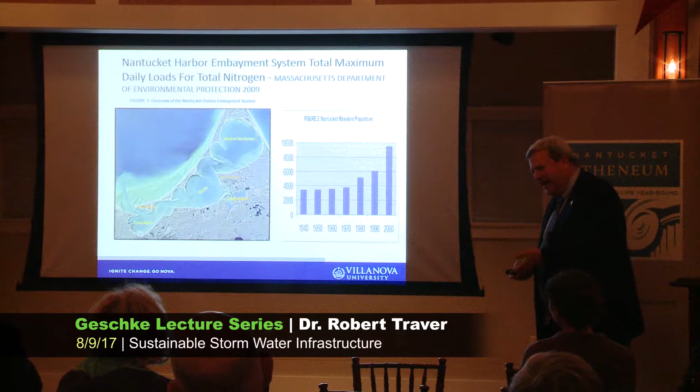It's always interesting to go to different areas of the country because the water issues are different everywhere you go. So I've done a little homework here, and from the conversations at dinner, I'm sure I will be corrected if I don't get it all right. But anyway, what is sustainable green stormwater and why is this important to us? So I started taking a look at, thank you for sending us some material ahead of time, your site page for your municipality.

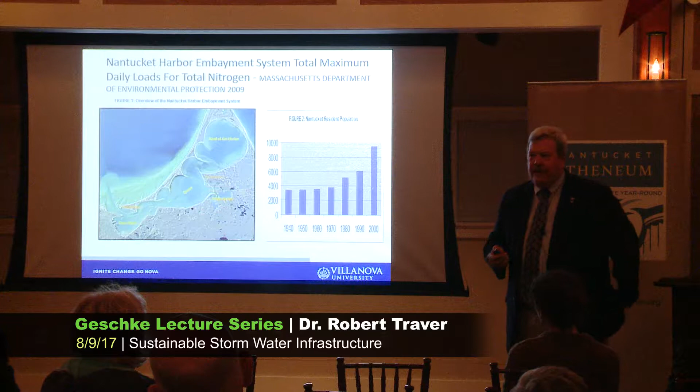And like many areas of the country, you have something called a TMDL, the total maximum daily load, and you're specifically focused on nitrogen. That is a requirement we have in the Clean Water Act to look at our waters and get them to fishable, swimmable status. In this case, your area is limited by nitrogen. It's very common all over the country, but each one is a little different. Yours is nitrogen, and it's basically related to scallops.

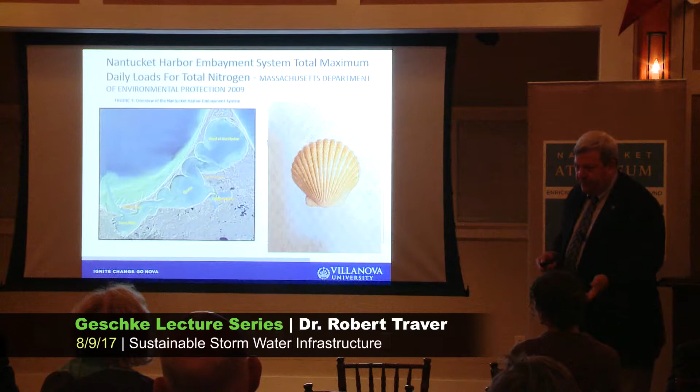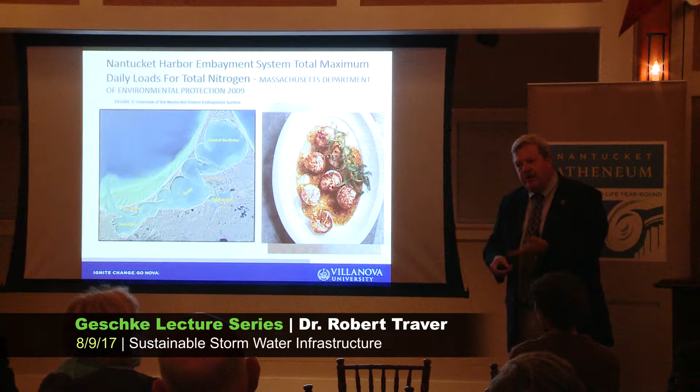From what I understand, your scallop industry is not as productive as it was, and it's off a little bit every year. I found this last night, so I came in early enough to do a little investigation of the beaches. And scallops represent an industry, a way of life, and something Nantucket is very famous for. It's a very tasty morsel, and just like Chesapeake Bay has been highlighting their crabs, you're very similar, but with scallops. And they are limited by nitrogen.

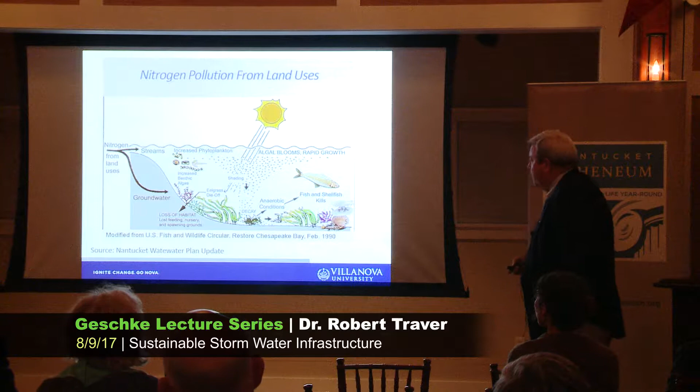So from this report back in, I think, 2009, they took a look at where all the nitrogen is coming from. Some is coming from atmospheric deposition to the surface. You're not going to be able to do anything except maybe vote 4 or 5 times, because that is a national issue about air pollution coming out of the atmosphere. Fertilizer is part, septic is part, sediments.

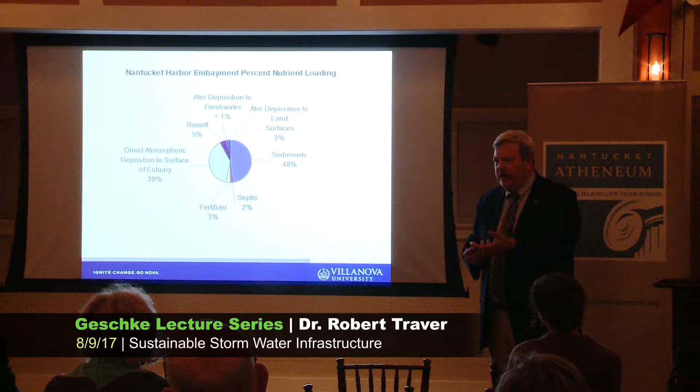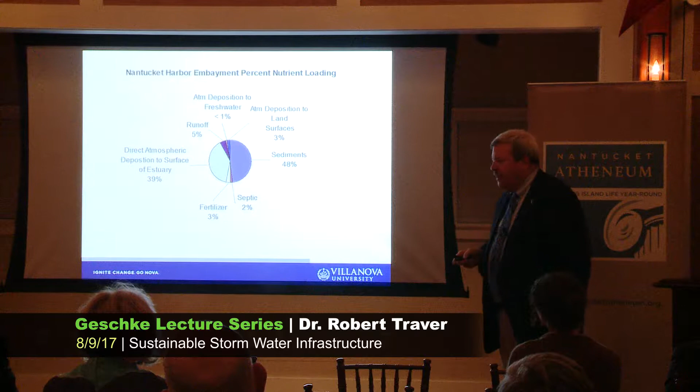Sediments might have been there for a long time and have a certain amount of nitrogen in them, but if you cut the source of nitrogen coming in, they'll eventually start decreasing. And then you have the atmospheric deposition to the land surfaces. Now, I would have put that with runoff, and the fertilizer with runoff, and some sediments with runoff. So runoff really isn't 5% of the problem, it's actually a lot higher.

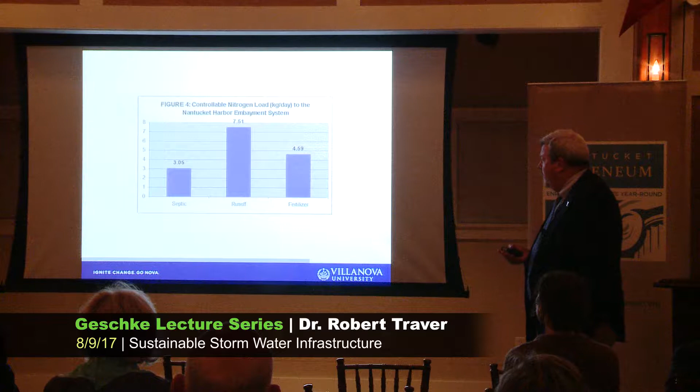And if I take the same report, estimated at what can be controlled by human activity by the citizens of Nantucket, these are the three that they came up with, and these are the targets. And I'm not going to pretend, I was reading some articles for and against septic systems and replacements. I'm not going to get into that tonight because I really don't know all the background.

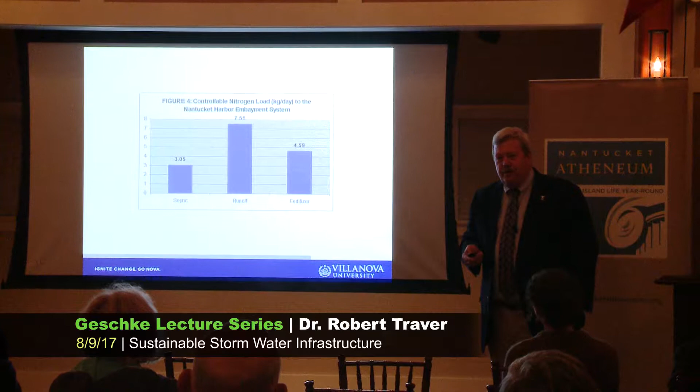But runoff is something that is being targeted, and the fertilizer as well, which I would kind of lump the two of them together. Because where does the fertilizer go? It usually goes by the runoff to the streets and into the systems. And this is not just a Nantucket problem, this is a United States problem.

All over the country, when we take a look at the natural environment, most of the water infiltrates into the ground or evapotranspirates into the sky. The great proportion. Very little of it actually gets in the flooding in the rivers. That's a very small part of the yearly water cycle. And of course, that changes completely in the urban environment. You have a lot less evaporation, a lot more runoff, and very little infiltration back into the soil. So this is a problem in many areas.

And it's kind of interesting. When we first started looking at this, we just looked at the big storms. You know, the Sandys, the Floyds, Katrinas. But then we started realizing from a water and environmental issue, it's every little storm.

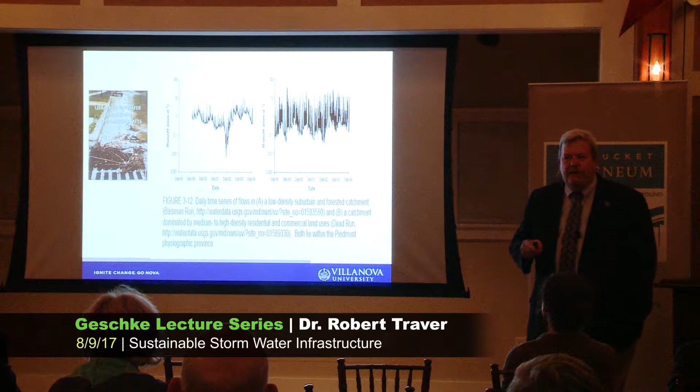So if I take a look, this is from a gauge in Maryland. The one on the left shows the effect on the rivers from the runoff from a green area. And the one on the right is from downtown Baltimore. And you can see the amplitude from the same rainfall, how much more of a problem it is. Every little rain is amplified and accelerated into the system.

And the results are all over the place, and these are some old slides, but there's some flooding in Pennsylvania. Obviously, you have floods, sediments, polluted waters, property loss. The rivers move through the accelerated water that will take property and give property to other people, I guess, as the rivers move.

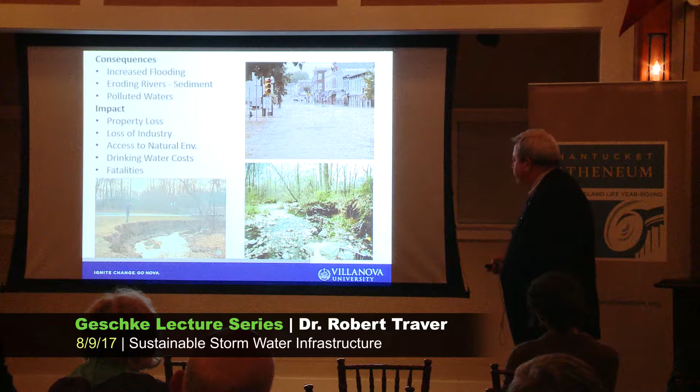And when we take a look at the biological response, when you start taking a look at all the stressors, whether it's flooding, habitat loss, the chemicals, the pollutants, heat, runoff off asphalt can be very hot and can change the heat of a lot of the stream systems. All together as a package, it's not very good on the biological activity in the rivers.

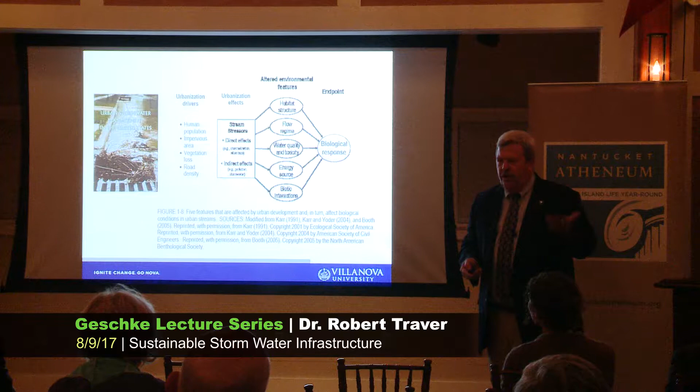So, a couple of years back, about 15 years ago, people decided we're no longer going to look at just the big storms. We better start taking a look at the smaller storms, what they call the non-point source pollution, which is what we're talking about in Nantucket as well. Some of the bigger cities, like Boston and Philadelphia, all over the place, also had a problem.

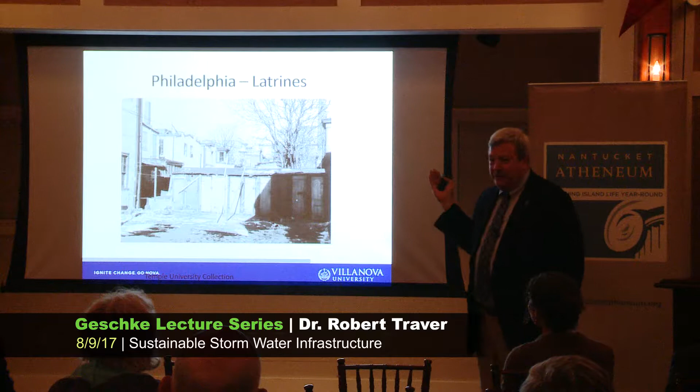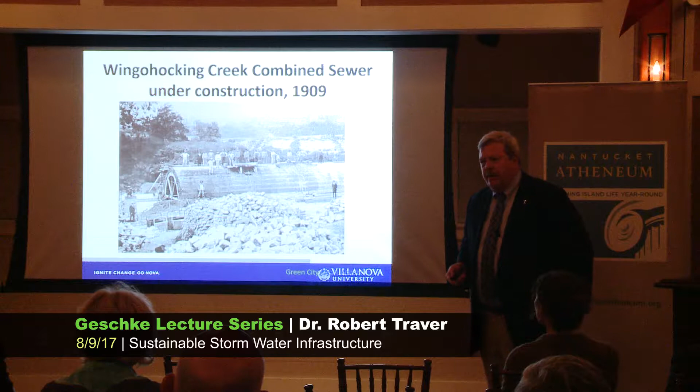Now, why somebody in 1902 would take pictures of outhouses, I have no idea. But I appreciate it, because it kind of shows some of the public health issues. And so Philadelphia and many cities in the United States started building what they called combined sewers. So they bricked over the rivers, they basically flattened the areas and built houses on top of them. And that became the way of getting rid of both the sanitary sewer and the runoff.

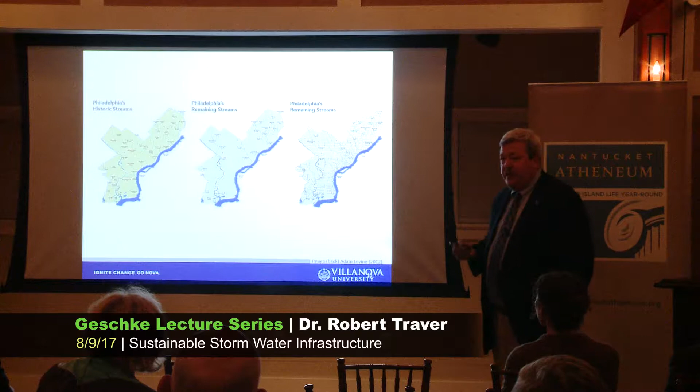Philadelphia, for an example, this is a picture. You can see the natural streams, and you can see this picture. They're all gone, and they all became combined sewers. And it wasn't until, at least in Philadelphia, the 1940s, that they directed these to a sanitary sewer plant.

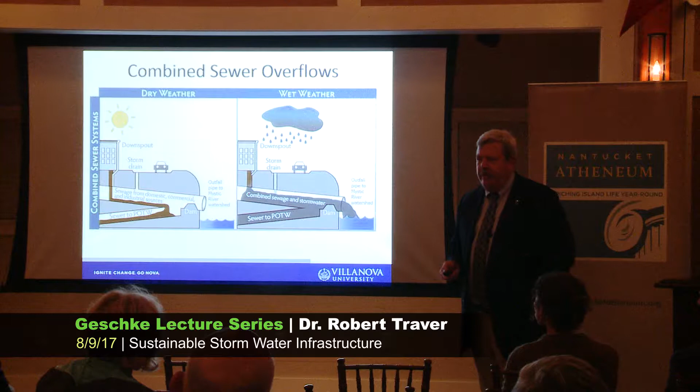Well, the problem with this, in many cities across the nation, is there's not enough capacity during storms. So if you get a half inch of rain or a quarter inch, 4/10 of an inch of rain, in many parts of Philadelphia we have raw sewage going to the Delaware and the Schuylkill River. And there's probably Minneapolis, Baltimore. Boston used to, but they built big tanks underneath. So this is a major problem in many, many U.S. cities.

So, to finally get to and solve all these problems, a new field was invented probably about 10 or 15 years ago. It's now called green infrastructure. In China, they called it Sponge City. In Britain, they call it SUDS.

I kind of like that better. Sustainable Urban Drainage System. I tried SUDS with my fish and chips yesterday.

But anyway, really, it's a new way of looking at stormwater management. What we're going to try to do in stormwater management is use that infiltration and evapotranspiration and the natural processes, to include the soils that are very good at breaking down some of the pollutants or capturing them instead. And so it's been a new way of thinking.

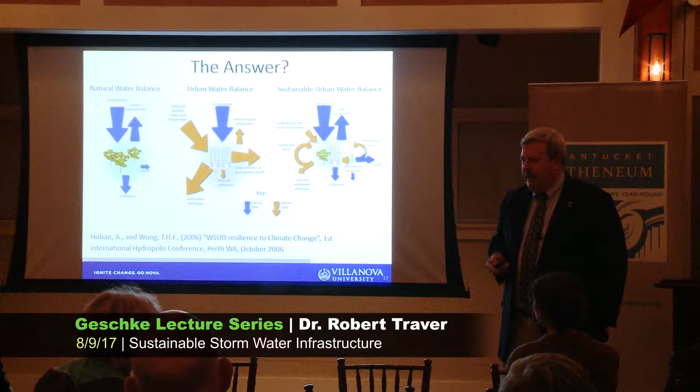Philadelphia, for an example, decided against building gigantic tanks underground like Boston has, because after you build the tanks, they're really not helping you. They're stopping the sanitary sewage, but they're not adding jobs, and they're not adding to the life of the city. Philadelphia's decided to green the city instead.

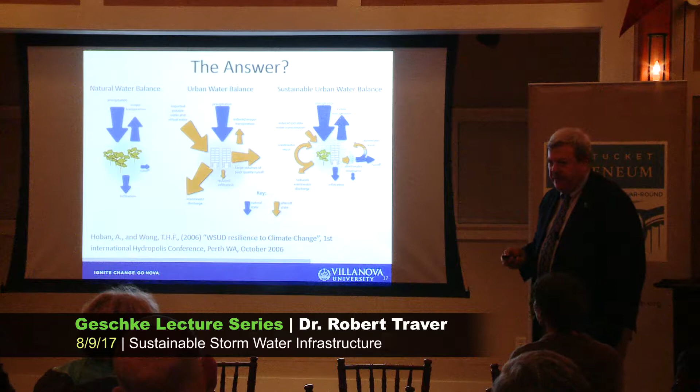It's a 40-year plan. It's not a fast plan, because they thought they're going to add jobs, it's going to improve air quality. So it's kind of a revolution, and a lot of cities are looking at Philadelphia and following this same approach. So it's still fairly new.

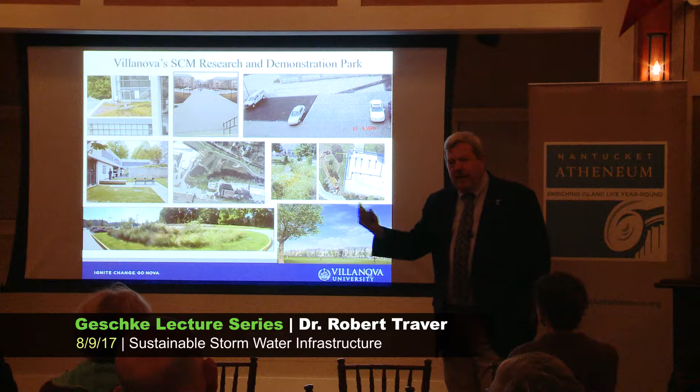So again, that takes water out that used to evapotranspirate into this air, and for the past 30 or 40 years has been eroding rivers downstream, and takes it out of that system. So lots of innovative ways of taking a look at these particular practices.

So, I remember I mentioned small volumes. Philadelphia has settled on 1.5 inches. But basically, when we start taking a look at the flooding, we used to design in my area for 8 inches or 7 inches of rain. Problem with that is we just kind of ignored the smaller rains.

But now we're finding if I take a look at 1 inch of rain and capture all the water in the first inch of rain, I have 80% of Philadelphia's water cycle. So that's a lot of water. So these small rains can be very impactful and are really the focus when you're looking at things like nitrogen in your bays. They also help for the flooding. After working on Katrina, believe me, I know the effects of flooding.

So I'm not downplaying that need. But there are like two different systems that you take a look at.

By the way, I don't have very many graphs. I figured that this would not be a good audience for graphs. So I'm trying to spare you, but I have to show one or two. I am an engineer, after all.

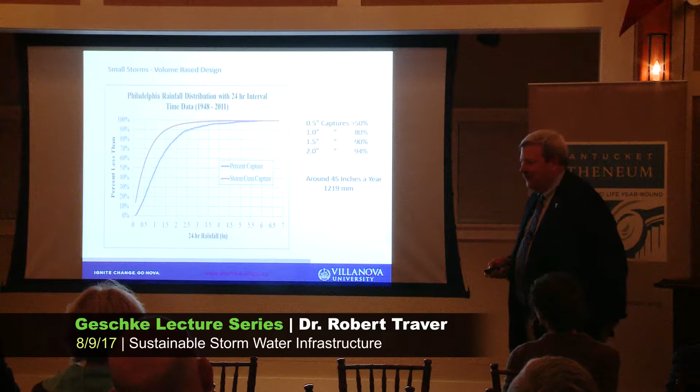You can take a picture. I think they're going to have my presentation, and I'll be glad to send you one if you want one as well. I'd have to comb my hair if you're going to take a picture.

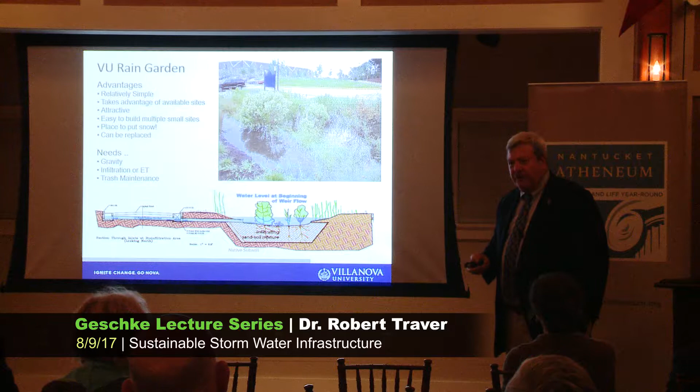And it's planted with not wetland vegetation, because most of the time it's dry, but we picked South Jersey beach plants because we figured they're used to the salts and used to this type of environment, sandy soil and wet and dry. And it's still there today.

In designing it, you take a look at it. For an example here, what we're showing is we take about 10 times the surface area of impervious surface coming in. That's kind of a rule. Some places say less, some places say more. And by the way, all my metrics are in violation of the local Pennsylvania DEP regulations on building these, but they paid for it, and I built it before they wrote the regulations.

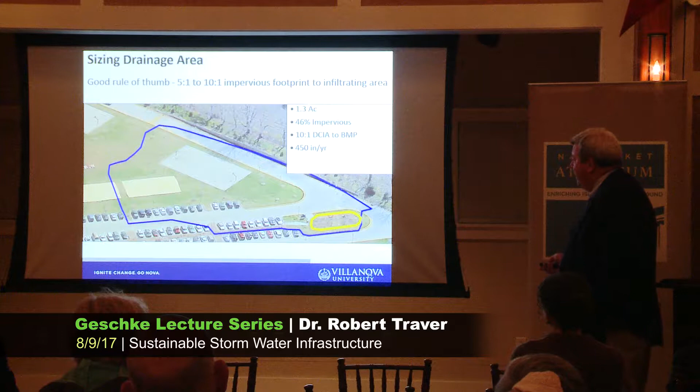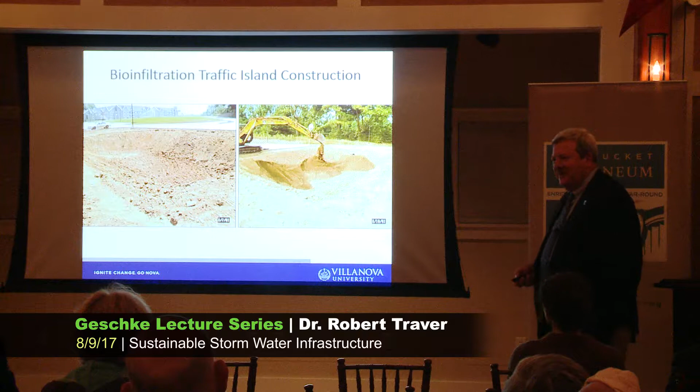But basically, we found that this site works incredibly well, and we simply dug it out, made sure not to compact the surface, put a sandy soil back in, and planted it. Oh, it's 16 years old, a little older than I thought. And basically, then we instrumented the heck out of it. As I said, we could have done a lot of business with you. We have water samplers for water quality, all sorts of sensors for measuring the flows. So this is a very heavily instrumented site.

And then from that, we've started learning how it works, because we kind of built it as engineers. The only soils experience I had was we compacted the heck out of it to make it nice and hard. My experience in gardening is my vegetation experience. So we started working with other groups on this, and we found that the different parts work differently.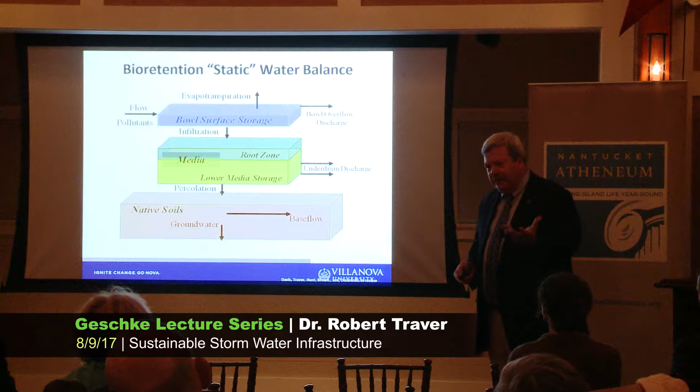So here's my bowl and my surface storage, and we also have a media. And what we're finding in the media is the roots of the plants are very effective at removing the water out of that media. When we first started building them, people thought they're going to be water all the time, but they're not. They're mostly dry. So we found that this void space in the media is usable, and then this starts becoming a very complex engineering process, because I've got water, I've got geotechnical aspects, I have to deal with the water chemistry, you start dealing with the plants. It gets to be a very complex engineering problem.

And by just simply measuring every storm, we find, looking over 15 years, the infiltration rate is slowly starting to increase on this site. And we think a lot of that is just frankly the roots of the plants drilling more holes through the soil.

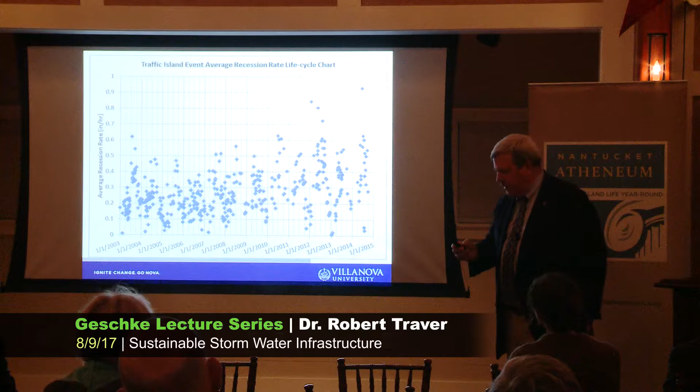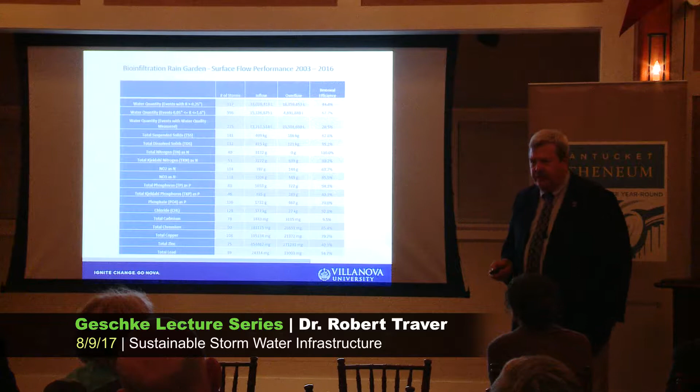Since we talked about nitrogen, I had to throw in a nitrogen slide. I'm sorry this is so busy. We changed our nitrogen test a little bit, but we're removing about 90% of the nitrogen from the water coming into this particular system. Now, a little bit of a teaser here. We're removing about 90% of the water going through the system. So you don't have to do a lot of math. If I get rid of 90% of the water, I'm probably getting 90% of the nitrogen coming through as well.

But we've also been looking underneath this water, underneath the soil, and looking at the water as it moves through the soil, and looking at the chemical properties of the soil. And the short answer, I threw this in just for you two. The short answer here is at the surface, down to 4 to 8 feet down, which is probably more than you can get, we're getting pretty good removals.

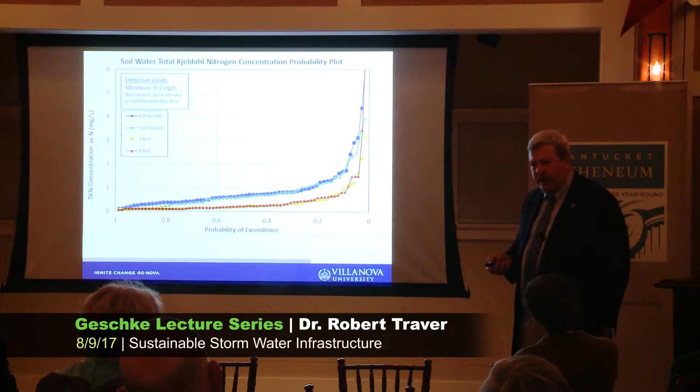This is a probability curve, just looking at it. So at about 50% of the storms, it's dropping it down well below, I believe, your TMDL requirements. And the funny thing is, after 4 feet, it doesn't make any difference. It may not make any difference after 2 feet, but I don't have any sensors at that particular point. So we're learning that these sites work very well for water quality, water quantity, and better than we ever thought.

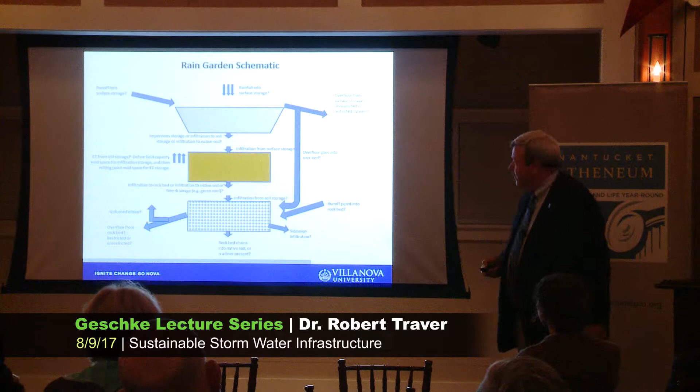And again, now we're starting to get into computer modeling and simulation, and we still have a long way to go within the profession. But what we're really finding is most of the sites we build are doing better than what we thought they would, which is a good problem. It doesn't happen often in engineering. And it's also a very useful place to put snow. It's amazing how high our facilities department can throw the snow in there.

So now we're starting to look at the snow impacts. And the biggest impact of the snow in Philadelphia is salts. You're right. Nothing removes the salts, they go right through. But of course, if you put this on the grass, the same thing would happen. So this does not help chlorides. We have some other projects in Villanova. I'll talk about a couple of them.

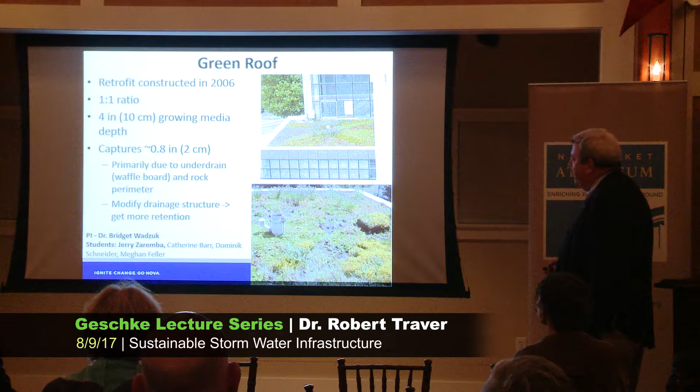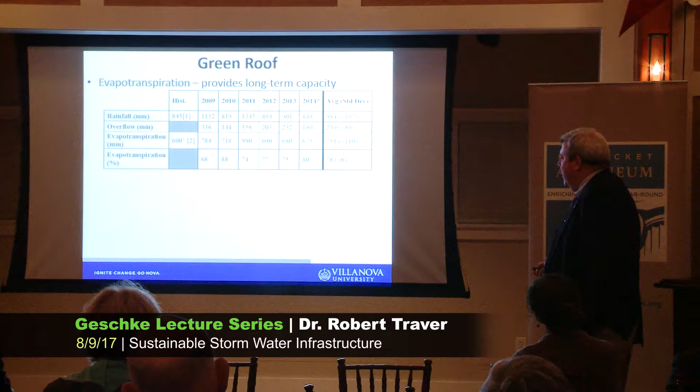For our green roof, this was actually a retrofit. It wasn't designed as a green roof. And we worked with the facilities department in putting this in. And we've been testing it for a while. And we learned some very important things. One, it's very effective again. Now, this is just evapotranspiration. So we're looking on a yearly basis and not including the winter for the studies. We're just getting to those. But we're looking at between 70 to 80% of the natural cycle. We're able to remove all the water from the green roof.

You know what our biggest problem has been? Professor, I'm trained to wait till somebody answers. But I won't do that to you. It doesn't rain all the time. So when there's no water, guess what? We have no evapotranspiration. It's just kind of sitting there. Sedum plants just kind of shrivel up and wait for the next rainfall event.

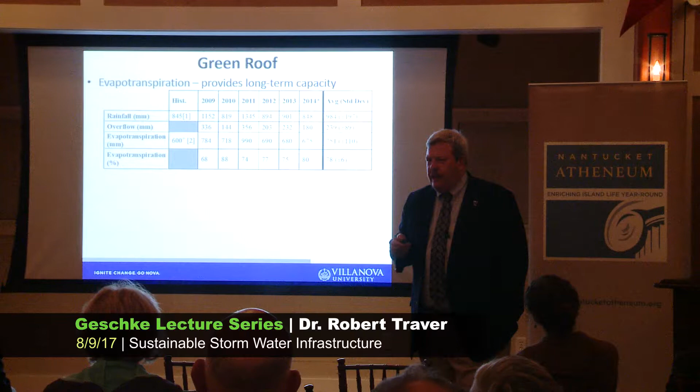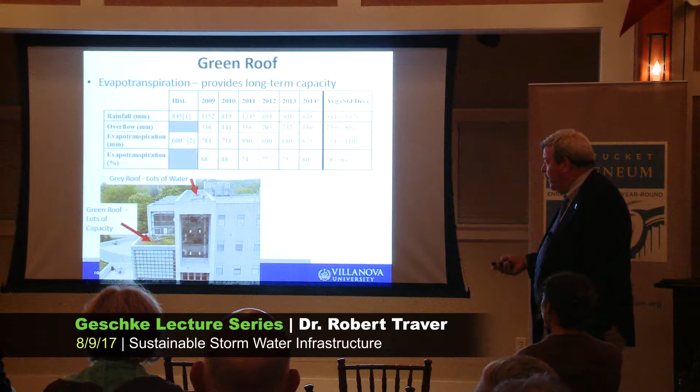So we started thinking that this site could get rid of a lot more water if we could get it to it. So we take a look at our engineering building and our gray roof. We have a lot of water coming off a gray roof that does not have a green roof. And so what we did was we piped it down into a tank. That tank now goes, when the green roof is dry, which we determine using soil moisture sensors, to water it so we can get 2 or 3 times the performance out of the same roof, which is going to be a heck of a cost savings.

And the firm we're working with is from the Boston, Massachusetts area, and they're getting very popular for this. They even have it set up where they watch the weather forecast, and if there's a certain probability of a rainstorm higher than what we have available in the tank, they actually empty the tank before the rain comes so they can get more of the storm flooding issues.

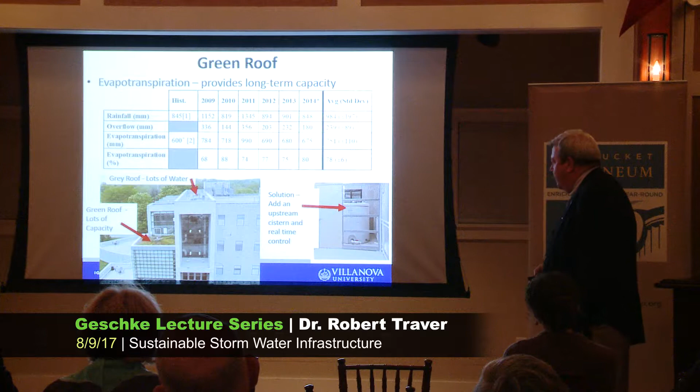The other thing we've learned, again, from this is how powerful the evapotranspiration force is. It's much more powerful than we thought in emptying the water after a storm from all our rain gardens, which is very good news. So doing the projects in tandem has also helped us as well.

We also, I don't usually throw this in, but we also have a constructed stormwater wetland that we're working with. I've run into a few on the island during my hikes out to, what was that beach? Jetties Beach? Yeah, I saw a few out there in the conservation areas you had. And we turned an old detention pond into a stormwater wetland. And actually, I should say, whenever I say we, we have a whole bunch of grad students and a whole bunch of professors.

So it's not just me by any stretch of the imagination. But Bridget Wadzuk has taken on this project, has been working on it for, I guess, 10 years now. And we have about 45 acres coming into a surface area wetland, less than an acre. And basically, we find we get rid of about 20% of the nitrogen during storm events. And the big hit, we get rid of about 50% during the base flow, the low flows, which is probably the most important part of it.

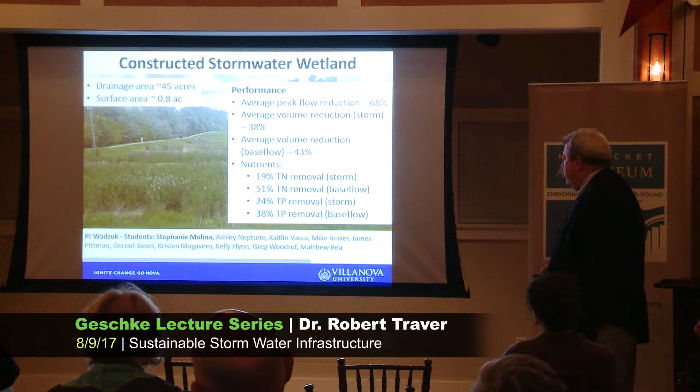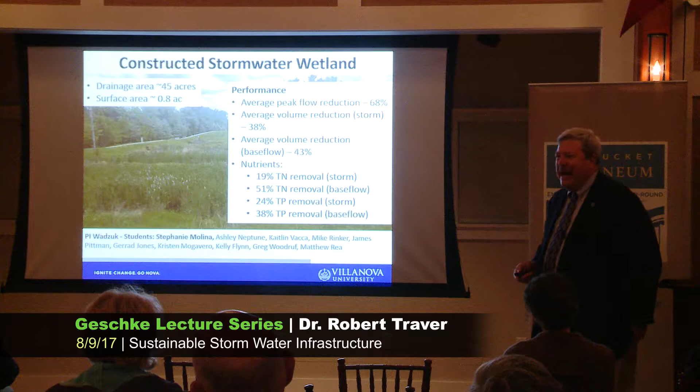Still lots to be learned on these processes. We've built our wetlands so the water has to zigzag and take a long time to go through. And it's been a very interesting study and a very, very pretty area. If you're a birder and you want to go down there, it's great. The only problem we had is one part of our university wanted to put bluebird houses, and I know the hawks love this site. I didn't think they might be happy with that outcome. But it's a beautiful area, as they say.

We also had kind of an interesting one. How bad was Sandy here? It's mostly south, right? Mostly south. It really didn't hit you here? Flooding. Well, what's that? Okay. Yeah, well, let's just talk about this site.

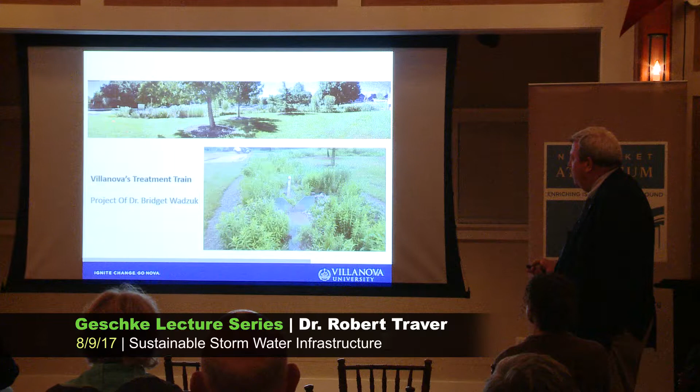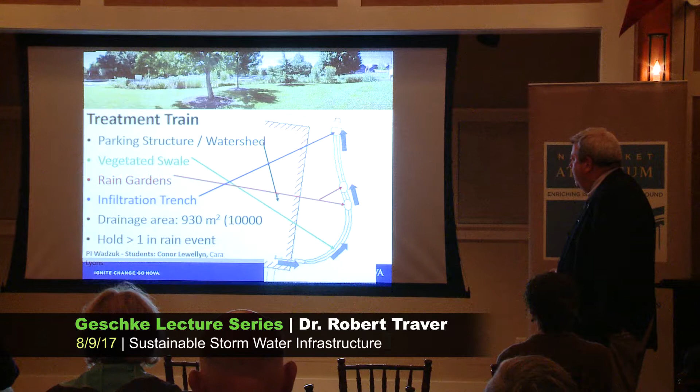We built this site as a long distributed site. And the reason we built it that way was trying to mimic areas where you don't have a lot of land, but you might have a linear feature. They call it kind of a treatment train approach, where we have a few little rain gardens and a swale in between the two. At the very end, it went into a rock bed. And here's another picture, just schematically, coming off a parking deck. The nice thing about parking decks is they're high, and water can be pushed down. It makes it a little easier for transport. But we built this whole thing trying to get rid of an inch of rain.

And then we had Superstorm Sandy. It's very interesting when you're watching the news and you see the track of the hurricane is over your house. We mostly had wind damage. But at Villanova, we had about 11 centimeters, close to 4 inches of rain. Almost no water escaped this site. And the site was designed for 1 inch. And the reason why we think it was doing that is we don't pay much attention to the processes of infiltration during a storm event.

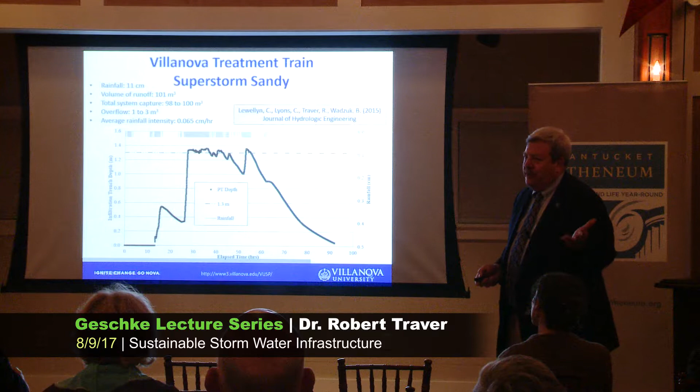But Sandy to us was a couple-day storm. It was a heavy rain for several days, not a super intense rain for a short period of time. So from this, we're starting to look at these a whole different way, about how we can bring them in for flooding as well and use some of these capabilities, or make them smaller so you don't have to spend as much money building them.

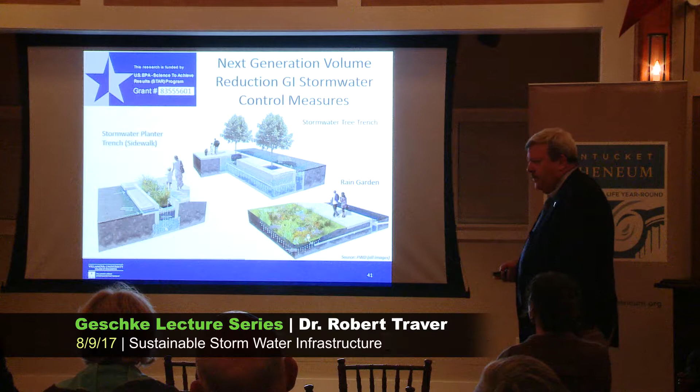Philadelphia, as I said, is trying to green the whole city. They're looking at a 40-year plan of thousands and thousands of sites. And here's one site. This is a pretty one. It's at the Philadelphia Zoo. It's the Giraffe rain garden, Giraffe lot, I should say. So my grad students forced me to make sure that our instrument pole looked like a giraffe here. But we are looking at radiation and rainfall and wind speed and all sorts of pressure to really instrument the site very heavily. And this site was again designed for about 1.5 inches.

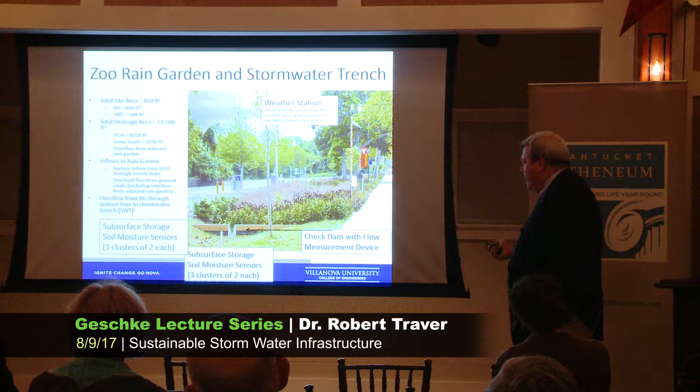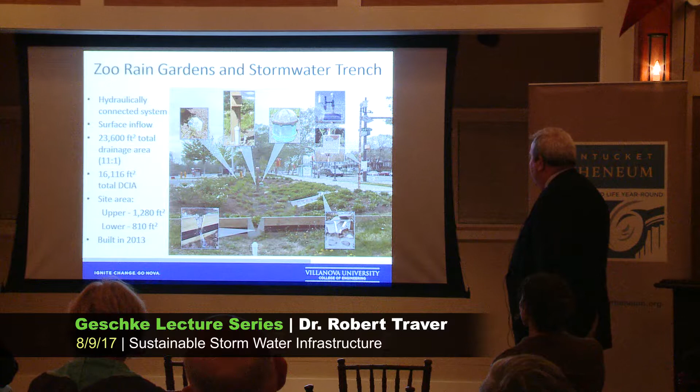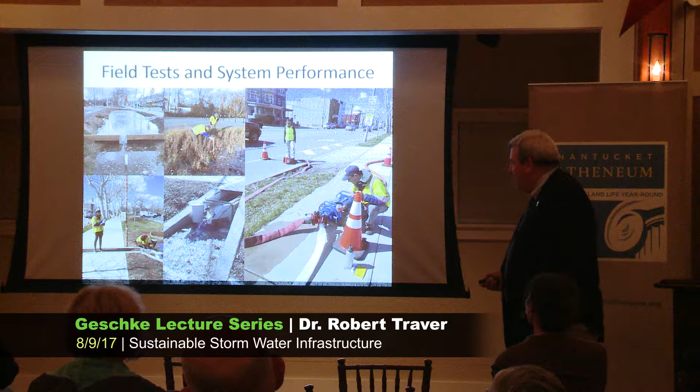And this is for you, all the sensors on the sites. I don't believe how much money you can spend on sensors. We even had to invent some flow meter devices because they were not available on the market. Basically, we've been working on this for a couple of years for the EPA. And we found out the Philadelphia Water Department, it's nice being a water department, when they want to test a site, they turn on the hydrants. And I thought, that's a great idea. So we're turning on the water to fill up the sites for testing. And we really wanted to stress it.

Here's the second and the last graph that I have. And what we found was we put in 2 inches of rain and barely reached the highest levels of the site. So that's more than it was designed for. Then somehow,

I got a new clicker here. Sorry, I'm not used to it.

Somehow, overnight, we had an unexpected 1-inch rainfall. And then the next day, we put another 2 inches down. So we put in like 5.5 inches of rain into a site designed for 1.5 inches. And now we're trying to figure out why it's working so well, because it violates all theory. And frankly, I think the clue was we see hundreds of earthworms swimming during the tests.

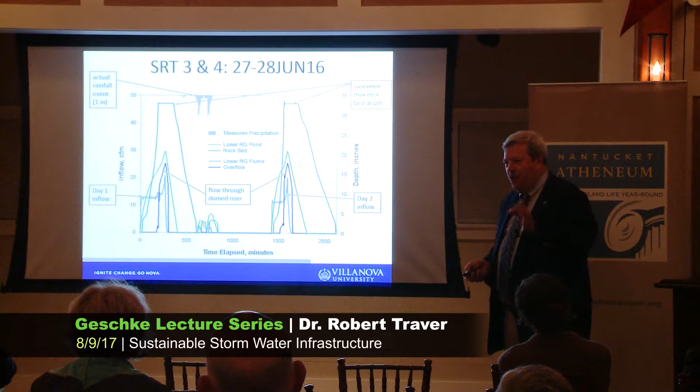And earthworms, they put holes through the soil along with the roots, and all the engineering equations do not assume that they're there. Now, how we build that into a computer model, I have no idea yet, but that's why we keep on doing research, as we say. So it makes it kind of fun. We're thinking about trying to figure out a smoke bomb underneath of it to see if we can see the smoke coming up and see if we can count the holes.

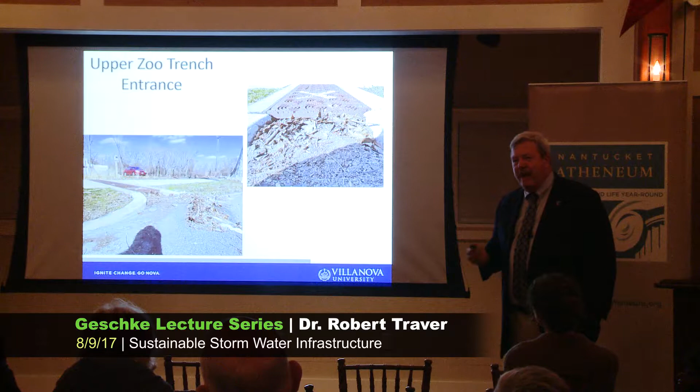And the other issues we're working with Philadelphia Water Department is on maintenance. This is an entrance to the site. They added a little asphalt patch to force the water to go in. They didn't make it big enough, didn't have enough slope, and now they have to keep on going out and cleaning it out. If you have thousands of these, you can't do that. So we actually are working with them as a research agency on some of these, trying to apply some hydraulics to come up with better designs.